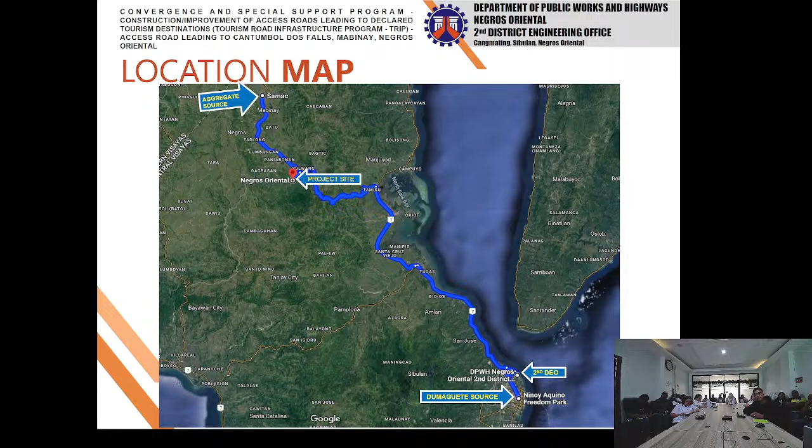We have the location map. The source of the aggregates will be in Samac River and the source of the cement will be in Dumaguete. This is the location map of the project.

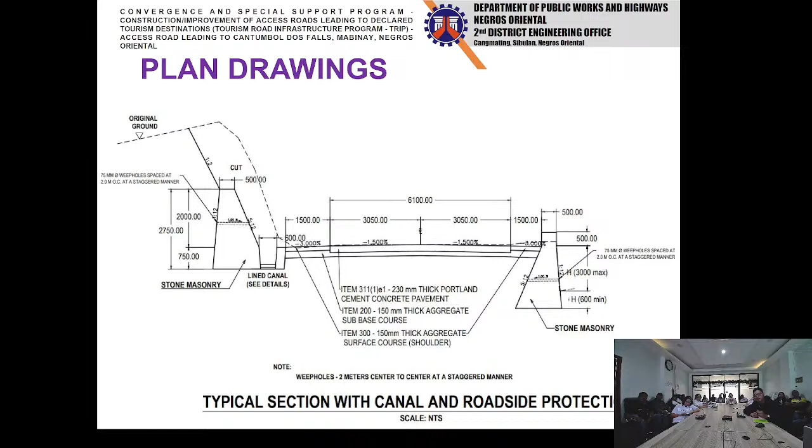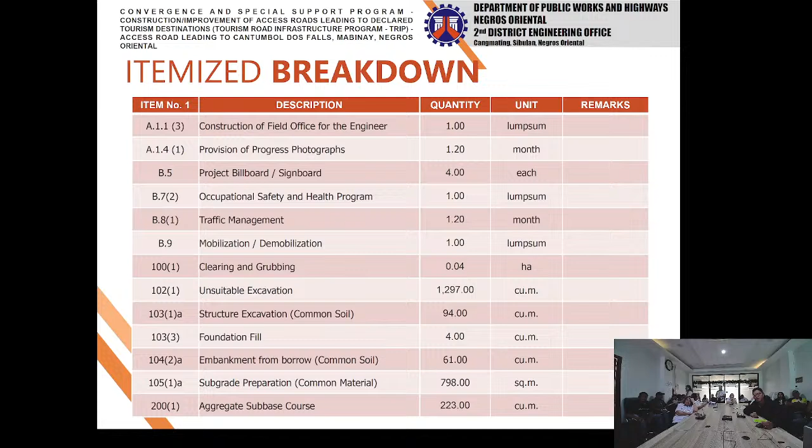The item is breakdown. So the scope of works will include the construction field office for the engineer, provision of progress photographs, project billboard or signboard, occupational safety and health program, traffic management, mobilization, demobilization, clearing and grubbing, unsuitable excavation, structure excavation, common soil, foundation fill, embankment from borrow, subgrade preparation, aggregate subbase course, gravel surface course, Portland cement concrete pavement 0.15 meters thick, 14 days, and Portland cement concrete pavement 0.23 meters thick, 14 days, lean concrete class B 16.5 megapascals, grouted riprap class A, stone masonry, and reflectorized thermoplastic pavement markings both white and yellow.

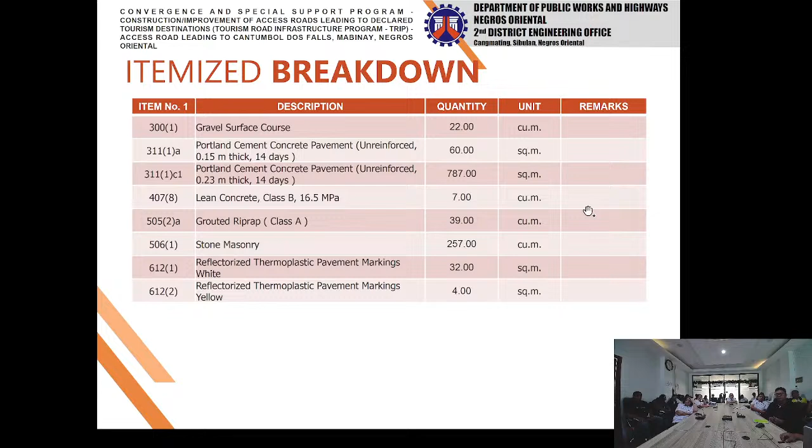Okay, any clarification? There's none. Proceed to next project.

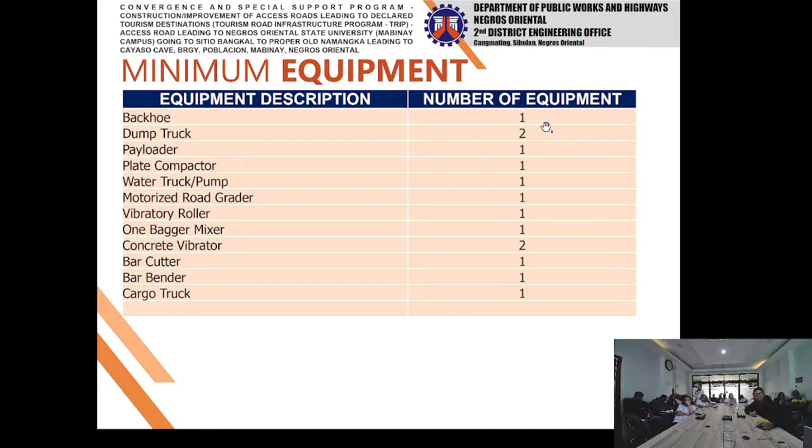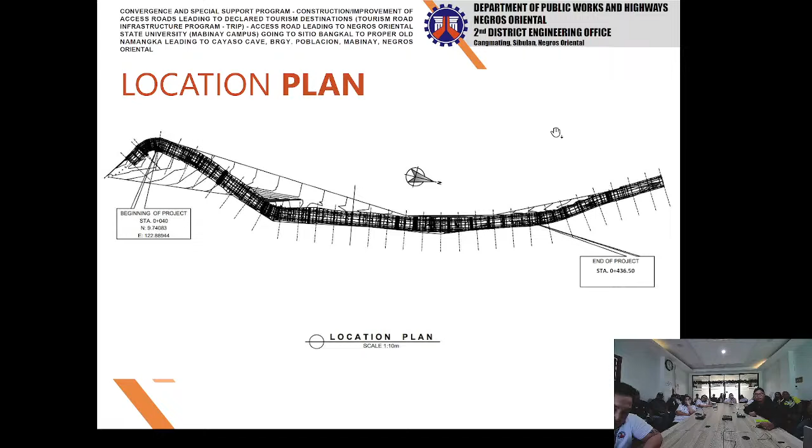This is the beginning of the project. This is the typical section of the project, and a super elevated section with roadside protection.

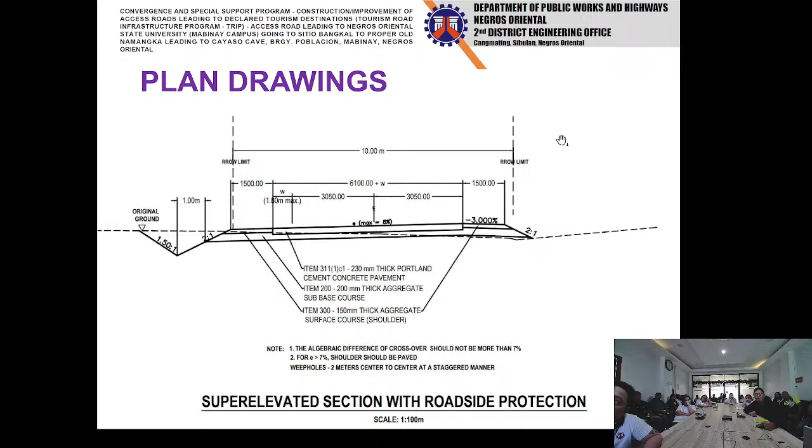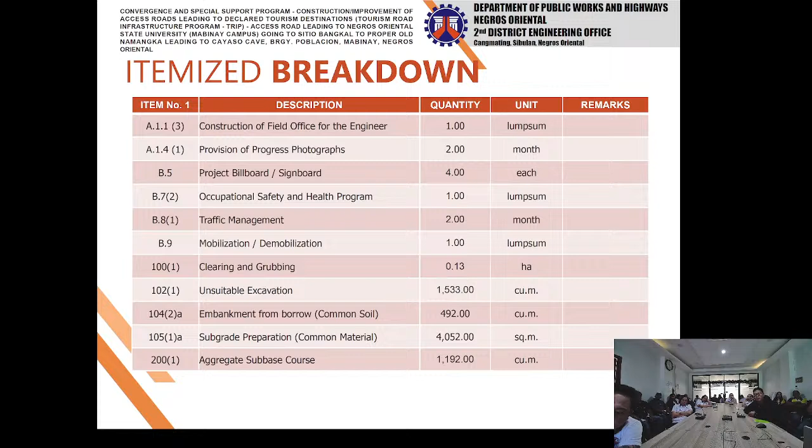from borrow, common soil, subgrade preparation, made of common material, aggregate subbase course, gravel surface course, Portland cement concrete pavement with thickness of 0.15 meters, 14 days, Portland cement concrete pavement with thickness of 0.23 meters, 14 days, and reflectorized thermoplastic pavement markings both white and yellow.

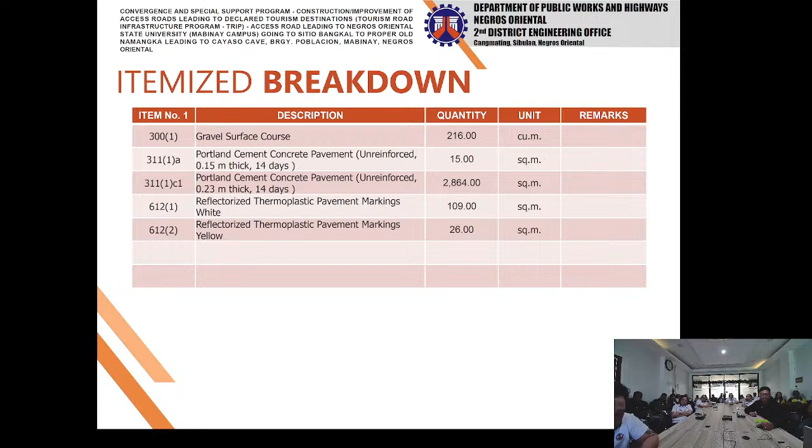The next project will be the Convergence and Special Support Program construction, access roads leading to declared tourism destinations, tourism road infrastructure program, access road from Sitio Palangging leading to Tindog Bato Lake, Bais City, Negros Oriental. Approved budget of contract will have 4.9 million pesos with a project duration of 36 calendar days

and an estimated length of 142.5 linear meters, and the pavement details 6.1 meters with a thickness of 0.23 meters. The minimum equipment are backhoe, dump truck, payloader, plate compactor, water truck or pump, motorized road grader, vibratory roller, one bagger mixer, concrete vibrator, bar cutter, bar bender, and cargo truck.

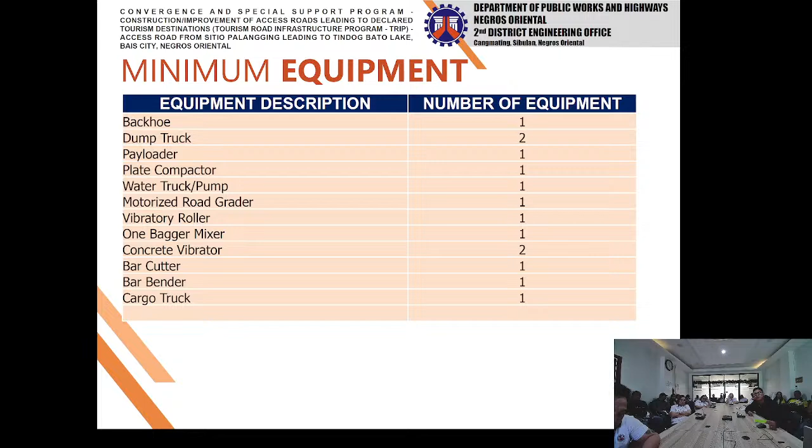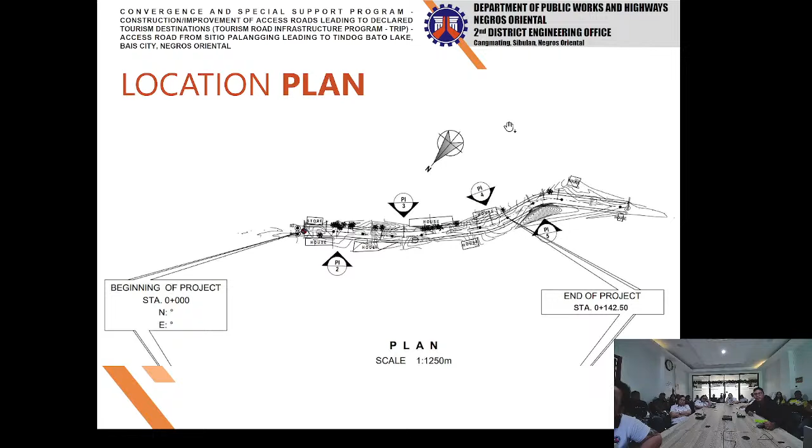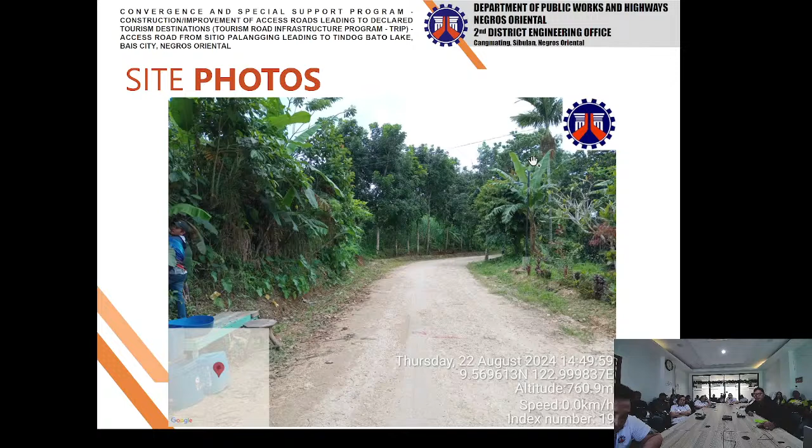Site photo the start of the project and the end station of the project. This is the typical section with the road slope protection and the super elevated section with road slope protection.

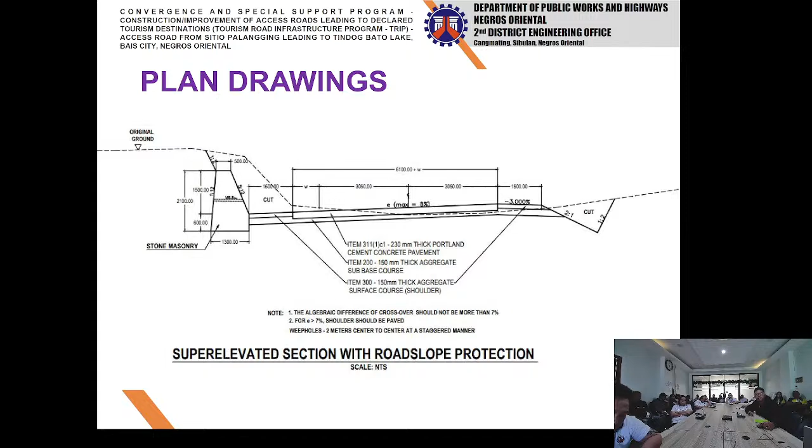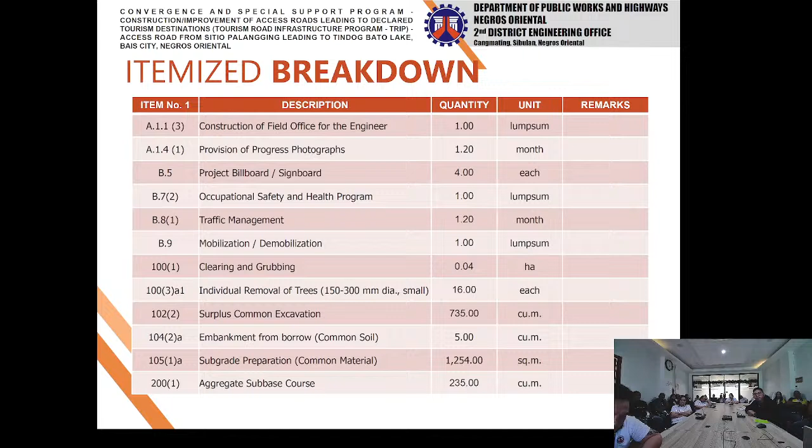The itemized breakdown. The scope of works will include the construction of field office for the engineer, provision of progress photographs, project billboard or signboard, occupational safety and health program, traffic management, mobilization or demobilization, clearing and grubbing, individual removal of trees, surplus common excavation, embankment from borrow, subgrade preparation, aggregate subbase course, gravel surface course, Portland cement concrete pavement

with thickness of 0.23 meters, 14 days, stone masonry, trees furnishing and transplanting, and reflectorized thermoplastic pavement markings both white and yellow.

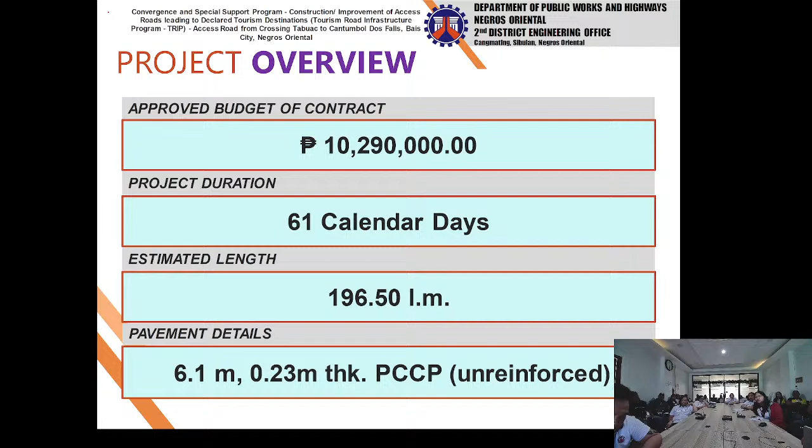Approved budget of contract: 10,290,000, project duration 61 calendar days, estimated length 196.50 linear meters, pavement detail 6.1 meters, 0.23 meters thickness.

Equipment: backhoe, dump truck, payloader, plate compactor, water truck, pump, motorized road grader, vibratory roller, one bagger mixer, concrete vibrator, bar cutter, bar bender, cargo truck.

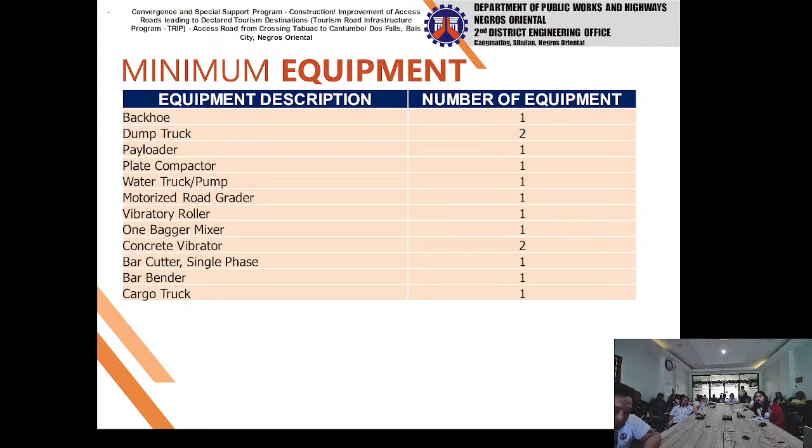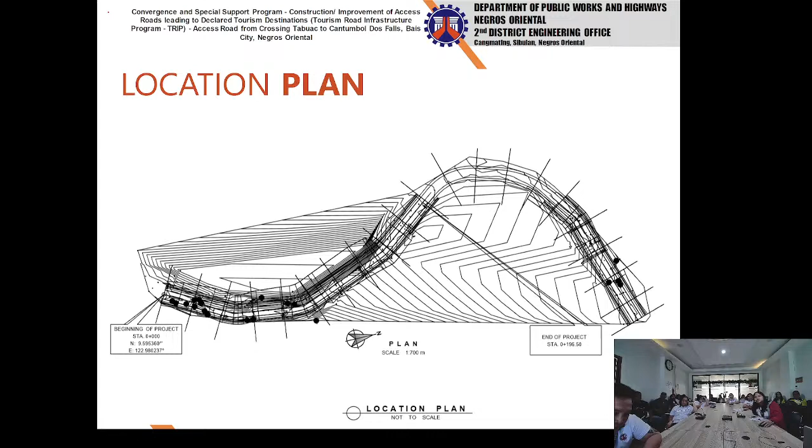So this is the location map. Aggregate source is from Samak River, Mabinay. So this is the location plan.

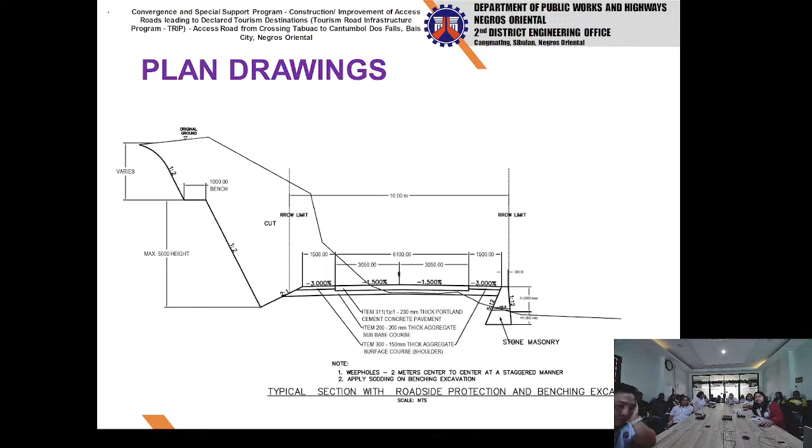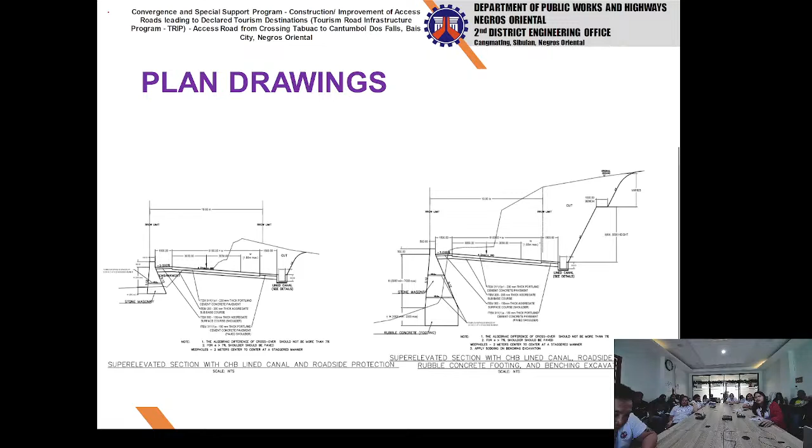Super elevated section with CHB lined canal. Super elevated section with CHB lined canal and roadside protection, and super elevated section with CHB lined canal, roadside protection with rubble concrete footing and benching excavation.

Itemized breakdown. Construction of field office for the engineer, progress photographs, project billboard or sign, occupational safety and health program, traffic management, mobilization, demobilization, clearing and grubbing, individual removal

of trees, unsuitable excavation, embankment from borrow, subgrade preparation, aggregate subbase course, gravel surface course, Portland cement concrete pavement 0.23 meters, 14 days, stone masonry, trees furnishing and transplanting, reflectorized thermoplastic pavement markings, white and yellow.

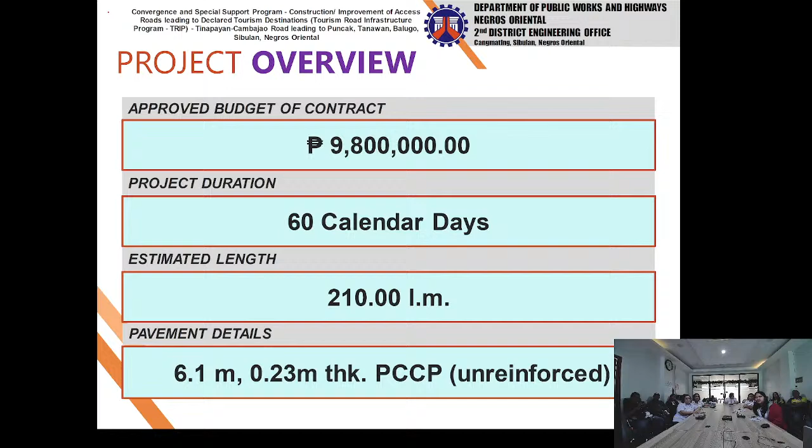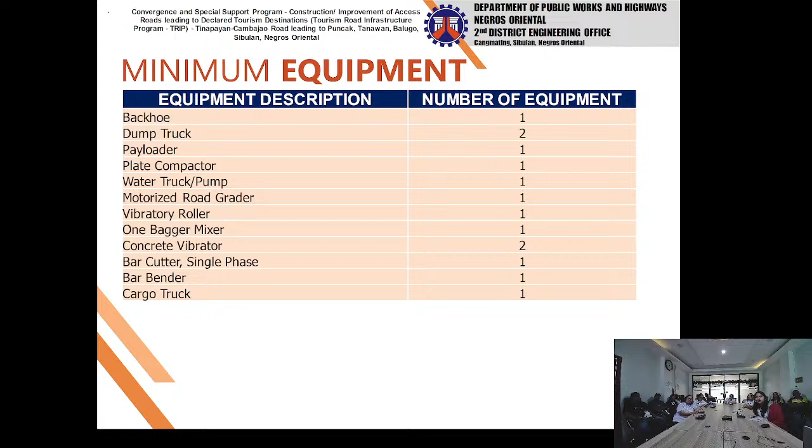Minimum equipment: backhoe, dump truck, payloader, plate compactor, water truck, motorized road grader, vibratory roller, one bagger mixer, concrete vibrator, cargo truck. So this is the location map.

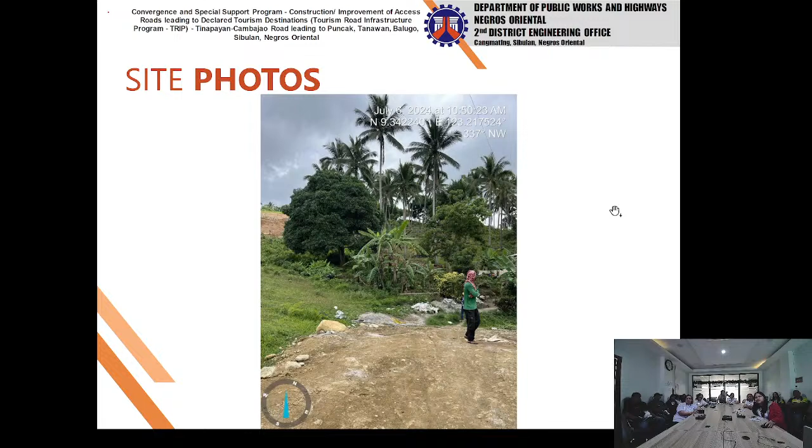Location plan. So these are the same photos.

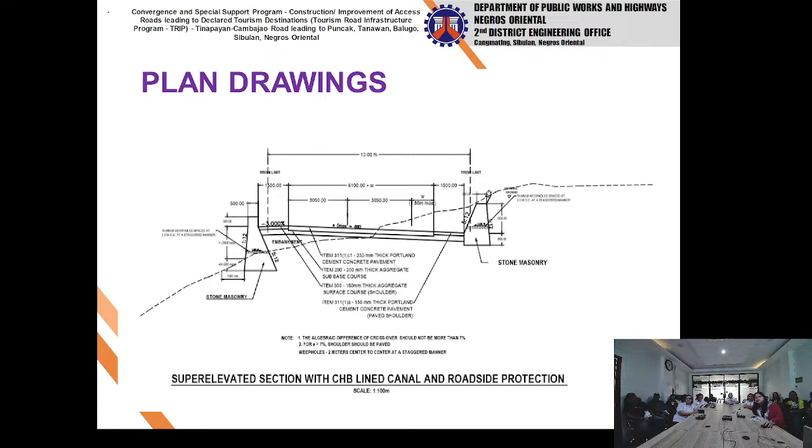This is the typical section, super elevated section with road slope and roadside protection. Super elevated section with CHB lined canal and roadside protection. And super elevated section with road slope protection.

Itemized breakdown: construction of field office for the engineer, provision of progress photographs, project billboard or signboard, occupational safety and health program, traffic management, mobilization, demobilization, clearing and grubbing, individual removal of trees, surplus common excavation, embankment from roadway or structure excavation, subgrade preparation, aggregate subbase course, gravel surface course, Portland cement concrete pavement, 0.15 meters thick, 14 days.

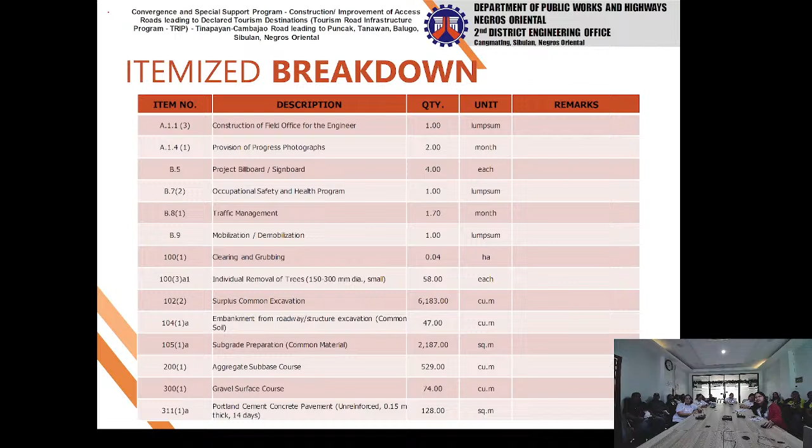Portland cement concrete pavement, 0.23 meters thick, 14 days. Stone masonry, trees furnishing and transplanting, reflectorized thermoplastic pavement markings white and yellow.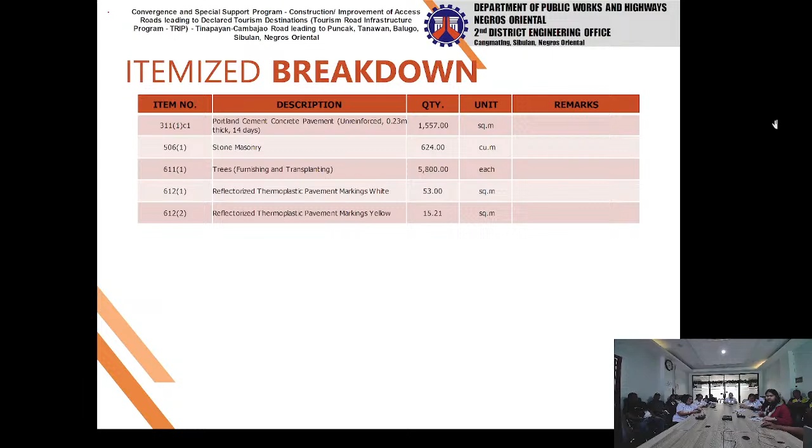Okay, any question and clarification? There will be none. Please proceed to next presenter, Engineer Basa, Procurement HQ 0033.

Good morning, everyone. Organizational outcome: protection of properties against major floods, construction, slope protection structure, Candau-ay, Batinguel, CIS.

Budget of contract: 14,700,000... Project duration is 138 days. Estimated length is 87 linear meters. Service classification: Flood control.

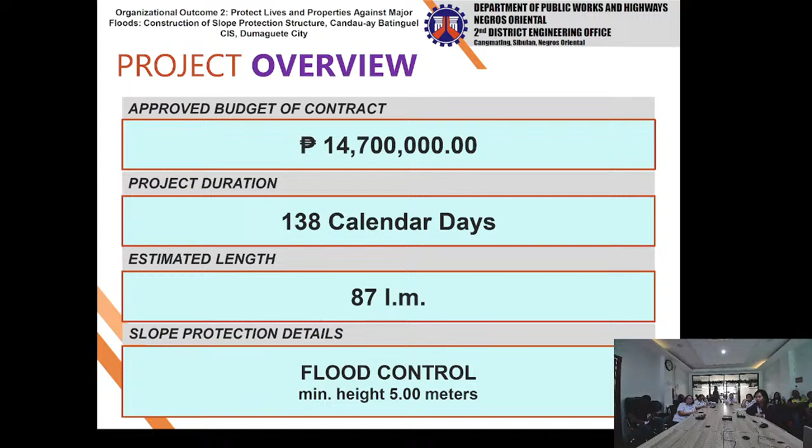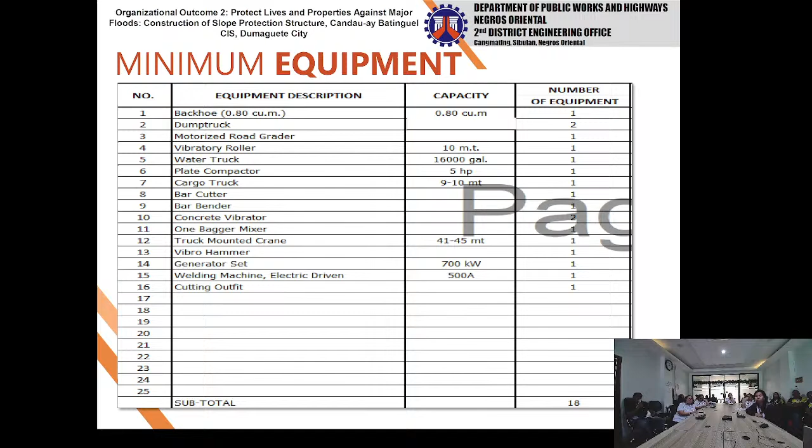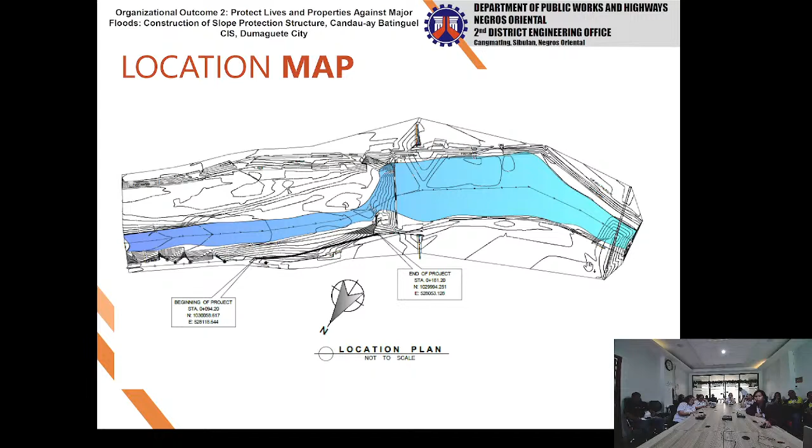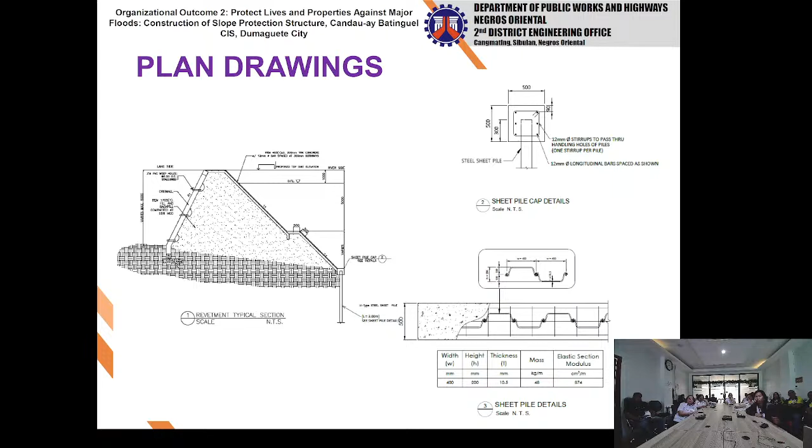Cribwall elevation, grouted riprap details, column elevation, details of...

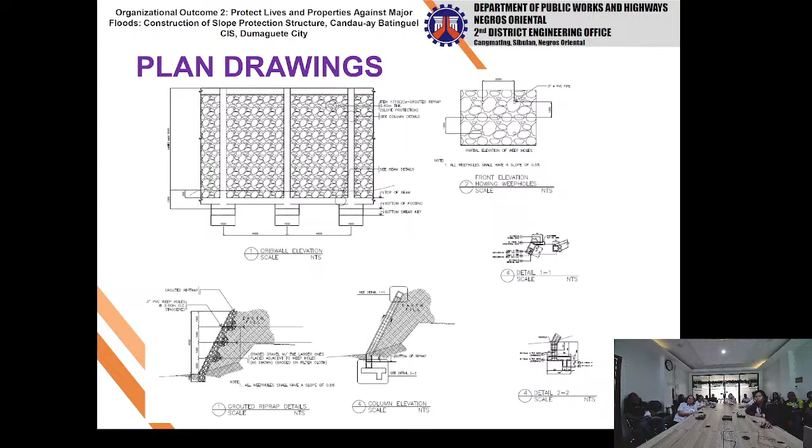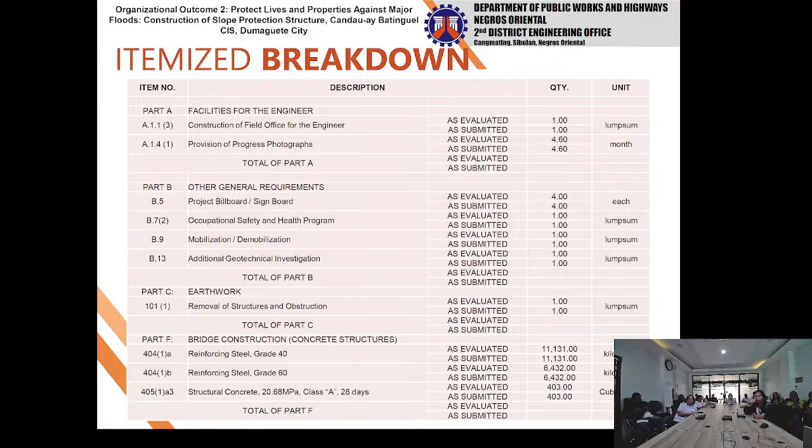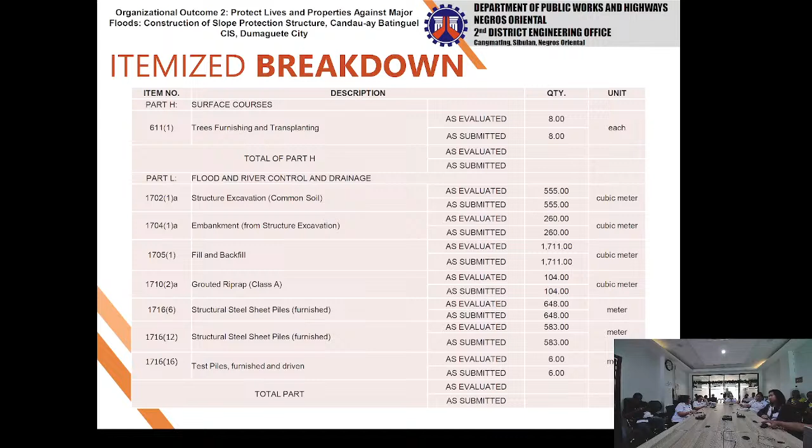That's okay, any clarification? Let's proceed to next presenter, Engineer Sagwan, for 25 HK 0036.

This project is 25 HK 0036. Organizational outcome 1: Ensure safe and reliable National Road System Network Development Program. Road widening, primary roads, Bais Kabankalan Road, station K0085 plus 190 to K0085 plus 848 and K0088 plus 074.1 to K0088 plus 500.

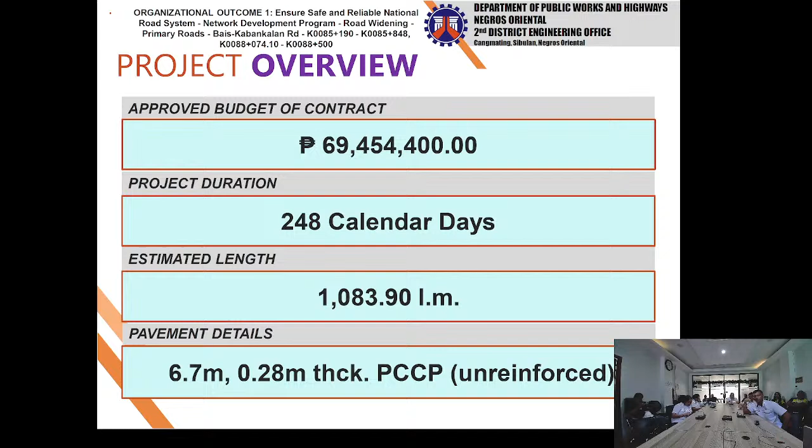Budget of contract: 69,454,400. Total calendar days: 248 calendar days. Estimated length: 1,083.9 linear meters. Pavement details: 6.7 meters with 0.28 meter thick PCCP unreinforced.

Minimum equipment requirement: backhoe with breaker, dump truck, cutting outfit, chainsaw, payloader, concrete saw blade, boom truck, plate compactor, water truck, vibratory roller, motorized road grader, concrete saw blade, concrete vibrator, bar cutter, joint sealant machine, bar bender, cargo truck, applicator machine, kneading machine, one bagger mixer, backhoe wheel type, cargo truck 2 to 5 metric tons, and concrete screeder.

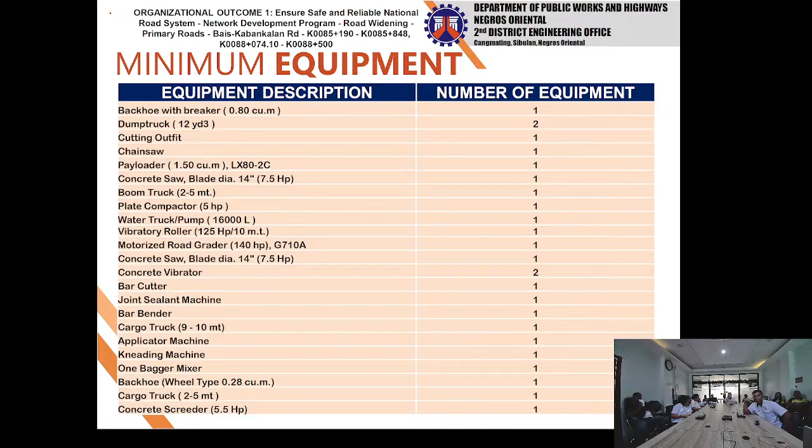Location map. The source of the aggregates is Tanjay River.

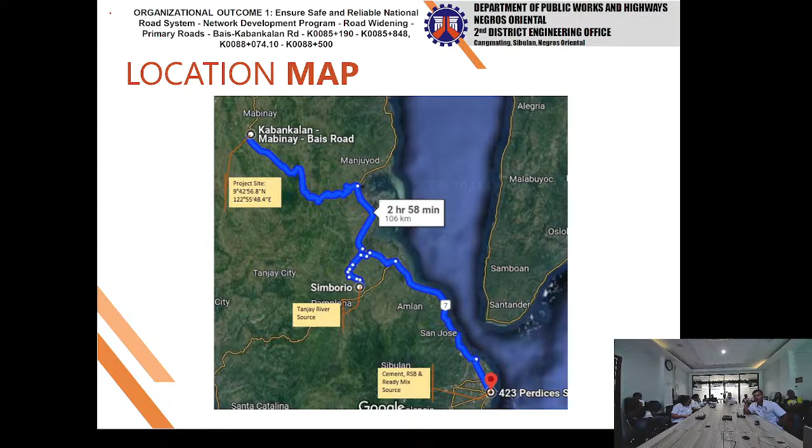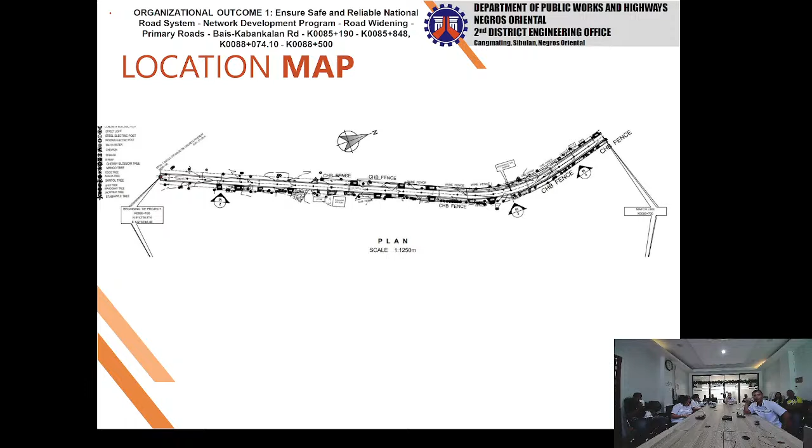The first site is located at kilometer 85,190 to kilometer 85,848.

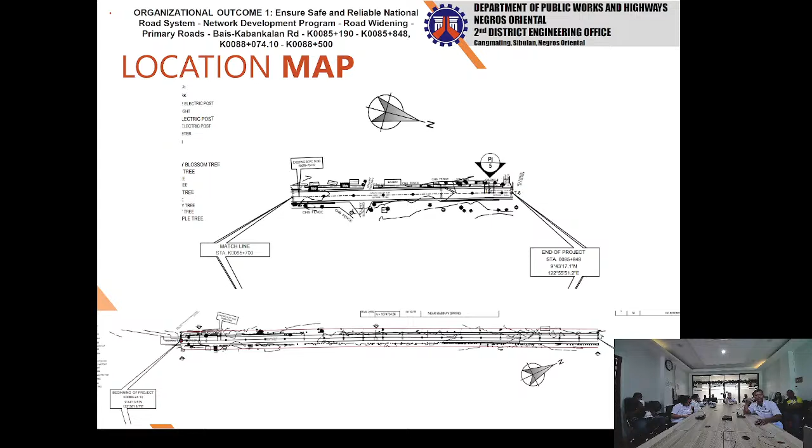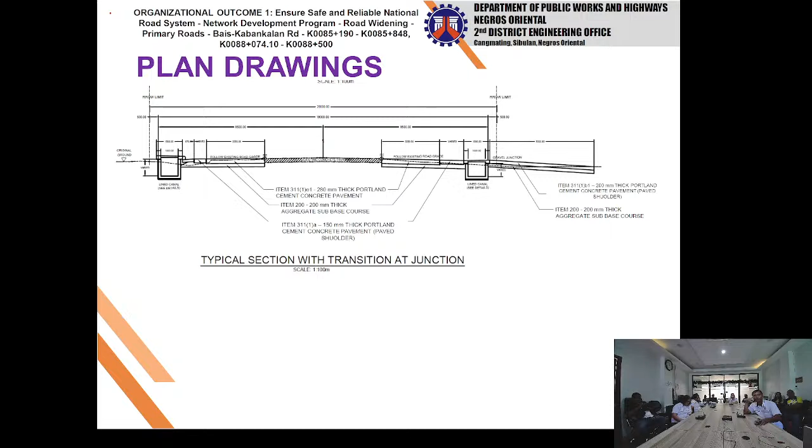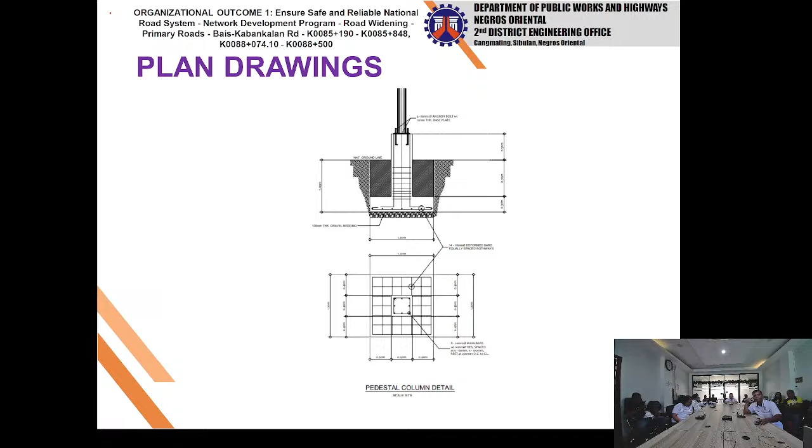and for pedestal column detail, itemized breakdown. Part A, facilities for the engineer, construction of field office for the engineer, provision of progress photographs. Part B, general requirements: project billboard signboard, occupational safety and health program, traffic management, mobilization, demobilization, removal and relocation of utilities.

Part C, earthwork: clearing and grubbing, removal of structures and obstruction, removal of other structures and obstructions, curb and gutter, removal of structures and obstruction concrete, individual removal of trees 150 to 300 mm diameter, 301 to 500 mm diameter, 751 to 900 mm diameter.

Part D, sub-base and base course, aggregate sub-base course. Part E, surface courses: Portland cement concrete pavement unreinforced 0.15 meter thick, 0.2 meter thick, 0.28 meter thick, and 0.3 meter thick.

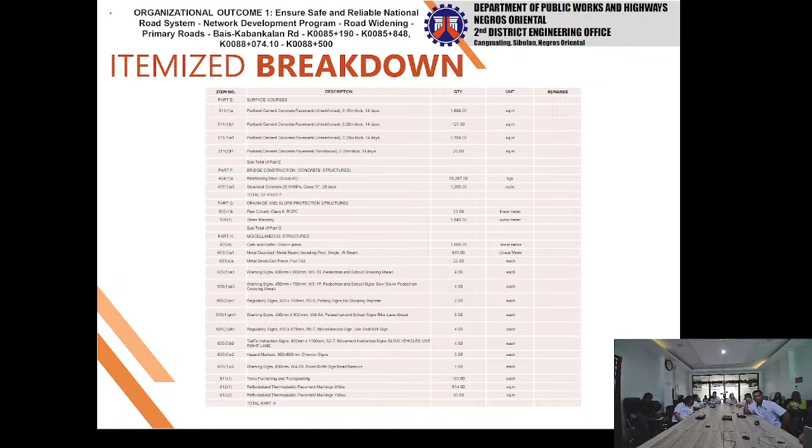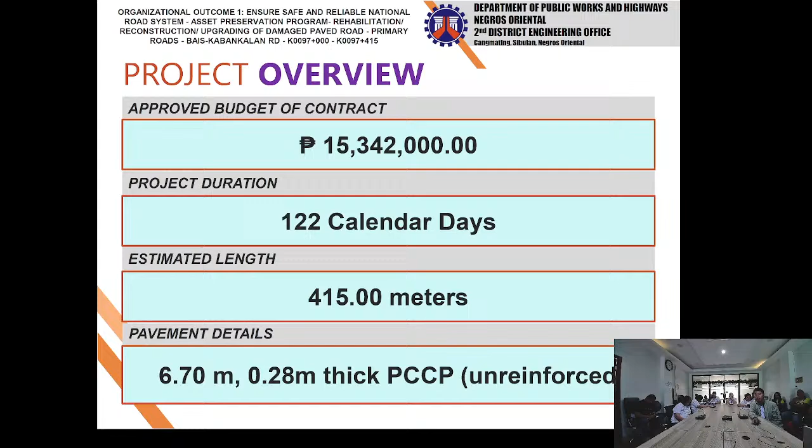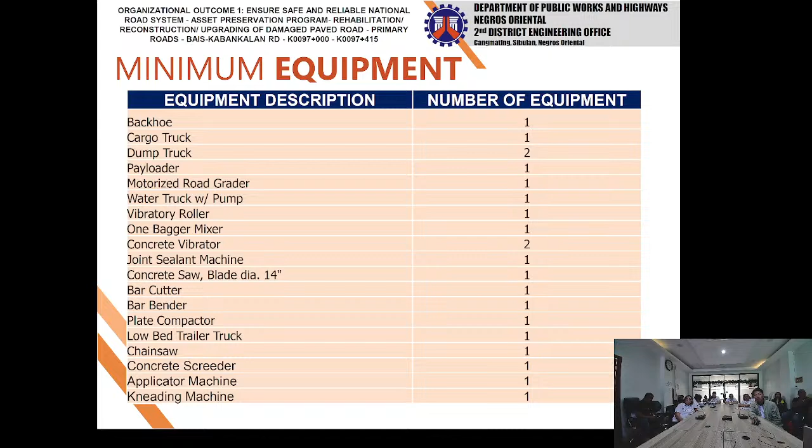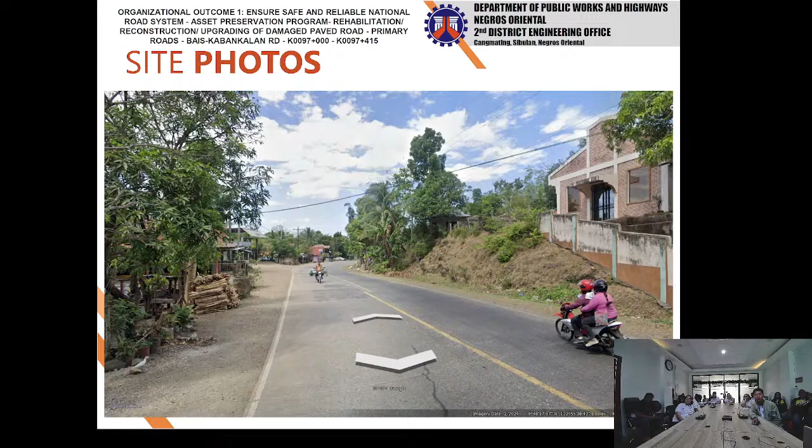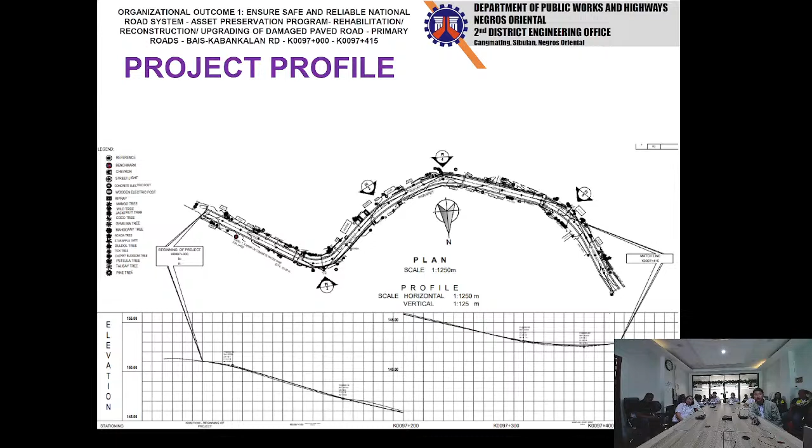And here we have the site photos, the picture, project profile. Here we have the super elevated section with boulder fill, and here we have the super elevated section with the existing RCBC.

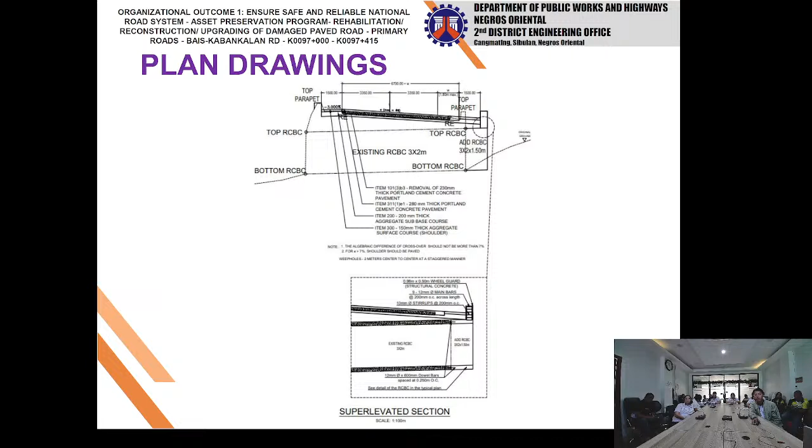So for the itemized breakdown, we have Part A, facilities for the engineer: construction and field office for the engineer, provision of progress photographs, and for the other general requirements we have project billboard signboard, occupational safety and health program, traffic management, mobilization, demobilization. For the earthworks, we have removal of actual structures, 0.23 meter thick PCCP unreinforced, unsuitable excavation, surplus

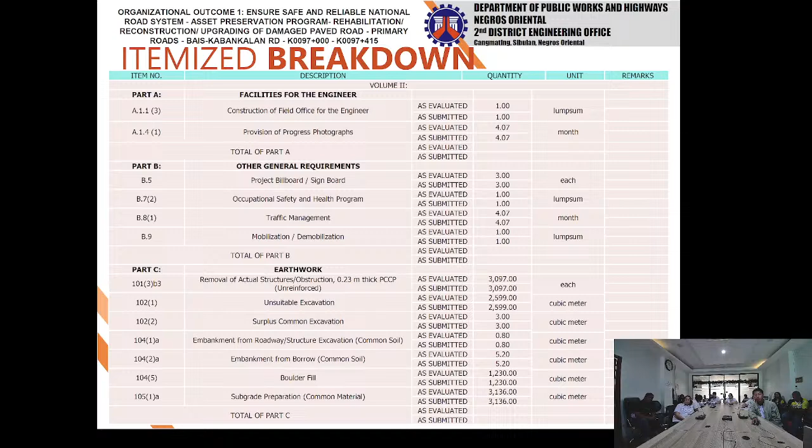common excavation, embankment from roadway, structure excavation common soil, embankment from borrow common soil, boulder fill, and subgrade preparation.

So for the subbase and base course, we have item 200, aggregate sub-base course. For the surface courses, we have gravel surface course, Portland cement concrete pavement unreinforced 0.28 meter thick, 14 days. For the bridge construction and concrete structures, we have reinforcing steel grade 40, reinforcing steel grade 60, and structural concrete 20.68 megapascals class A, 28 days.

For the drainage and slope protection structures, we have stone masonry. For the miscellaneous structures, we have traffic instruction signs, reduced speed, then hazard markers, chevron signs, and reflectorized thermoplastic pavement markings, white and yellow. That's all.

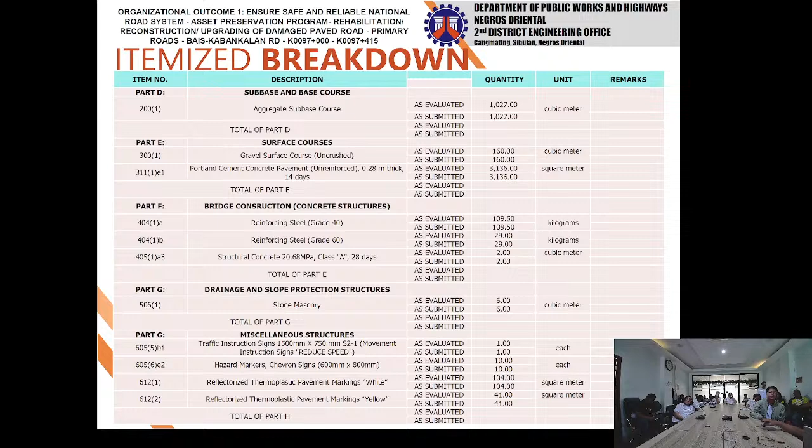Good morning, everyone. 25 HK 0040, Organizational Outcome 1, ensure safe reliable national road system network development program. Road widening primary roads, Bais-Kabankalan Road, kilometer 94 to kilometer 95.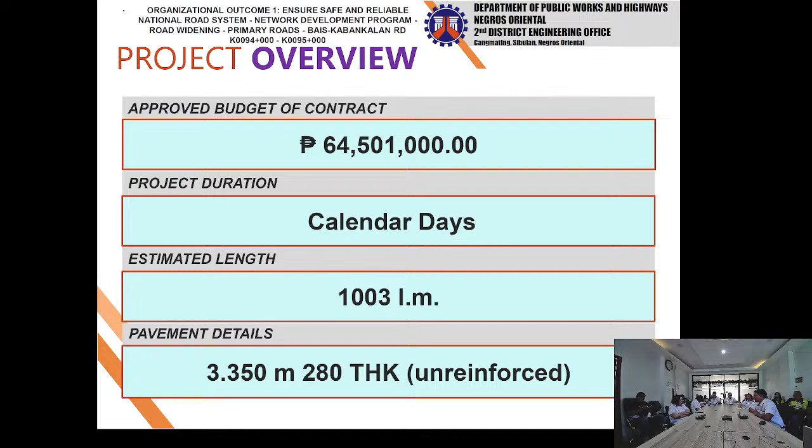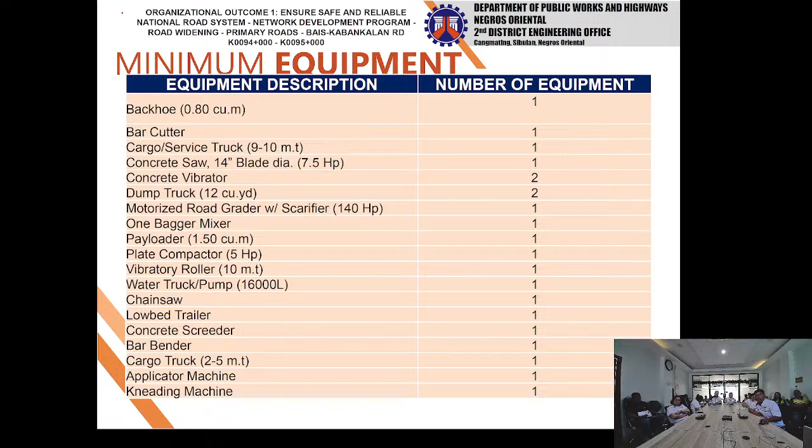The minimum equipment is backhoe, bar cutter, cargo service truck, concrete saw, concrete vibrator, dump truck, motorized road grader with scarifier, one bagger mixer, payloader, plate compactor, vibratory roller, water truck or pump truck, chainsaw, low bed trailer, concrete screeder, bar bender, cargo truck, applicator machine, and kneading machines.

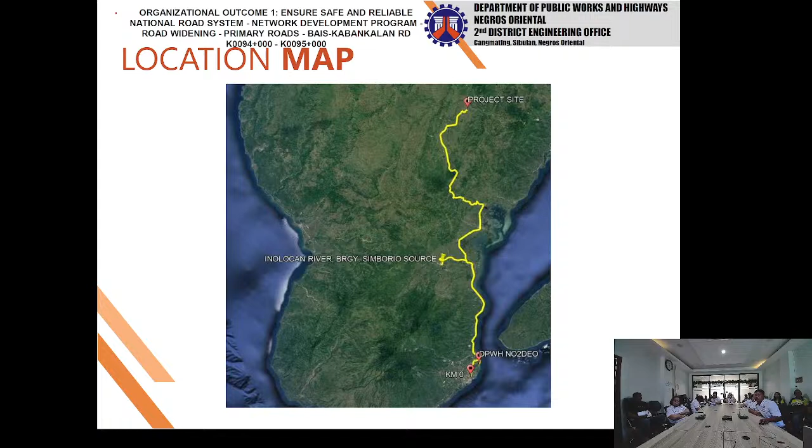Here is the location map. The aggregate source is in the Inolocan River, Barangay Simborio.

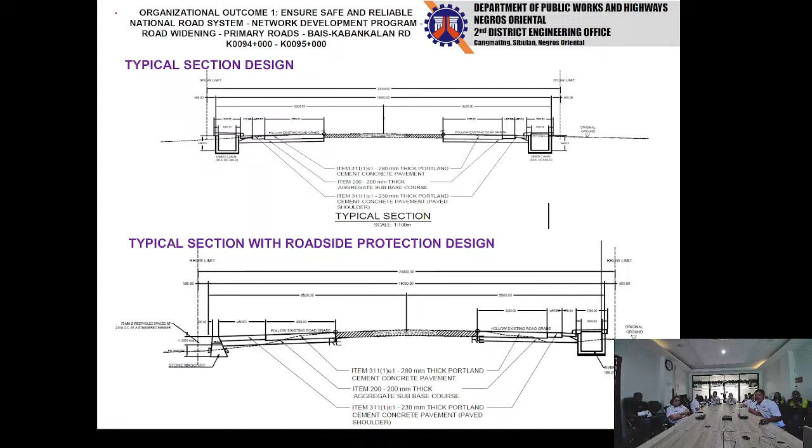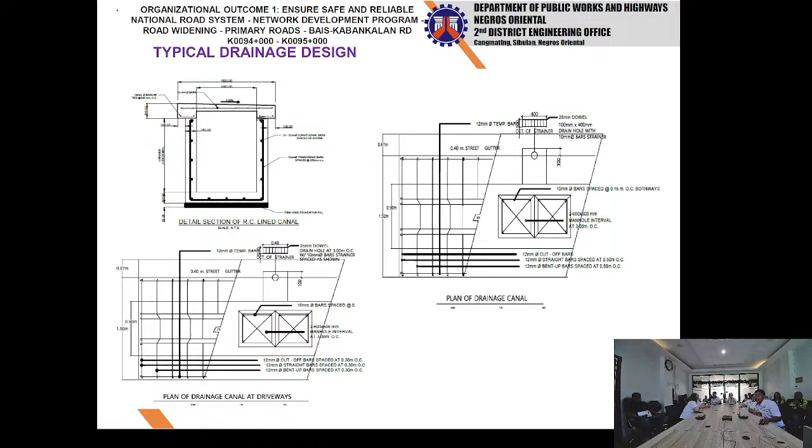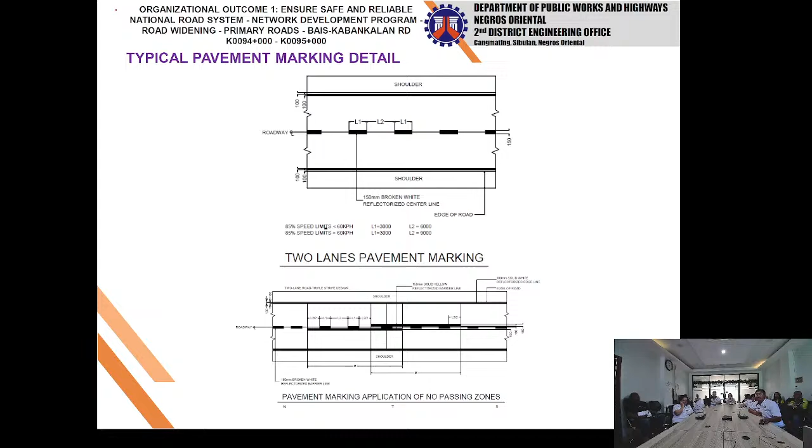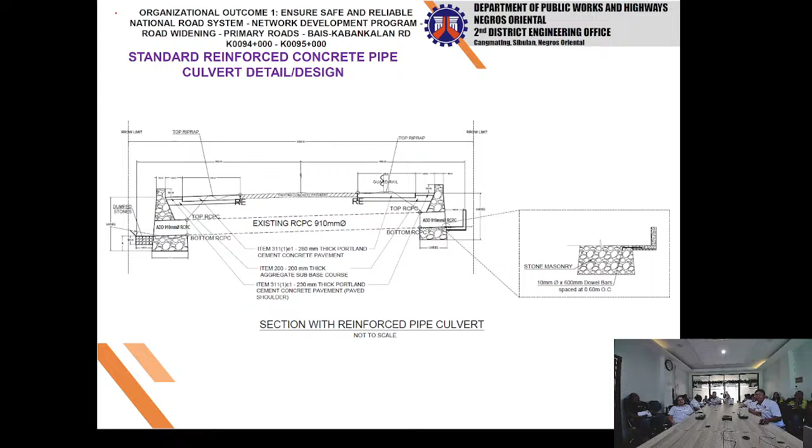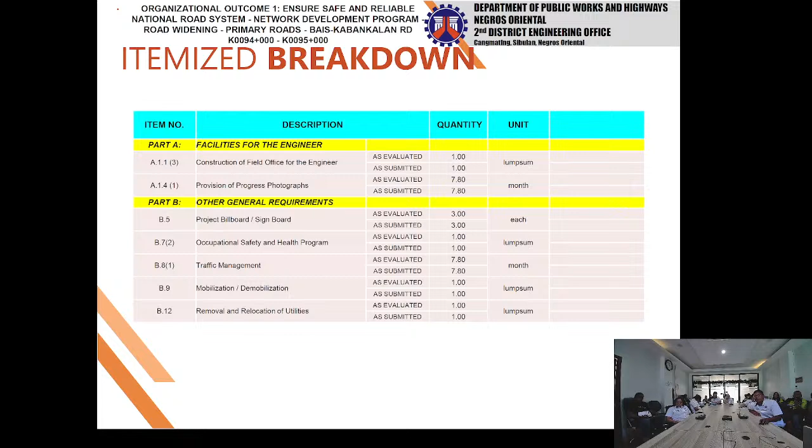Itemized breakdown. For part A, construction of field office for the engineer, provision of progress photographs. For part B, project billboard or signboard, occupational safety and health program, traffic management, mobilization or demobilization, removal and relocation

of utilities. For earthwork, clearing and grubbing, individual removal of trees, small 150 to 300 mm diameter, individual removal of trees, small 301 to 500 mm diameter, individual removal of trees, small 501 to 750 mm diameter, and individual removal of trees, 751 to 900 mm diameter.

Diameter, sorry ma'am, sorry.

Sorry ma'am. Removal of actual structures or obstruction, 0.28 meter thick PCCP unreinforced, removal of structures and obstruction, removal of surplus common excavation, structure excavation, common soil, foundation fill, embankment from roadway excavation, common soil, subgrade preparation, common material,

and for part D, aggregate sub-base course.

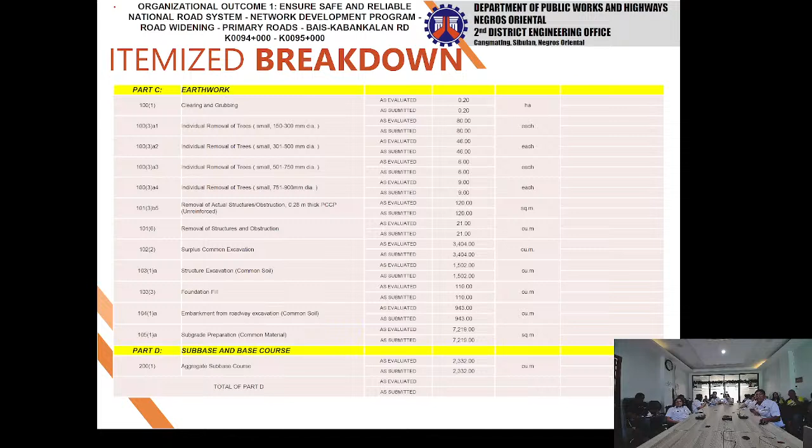For part E, Portland cement concrete pavement unreinforced, 0.23 meter thick, 14 days. Portland cement concrete pavement unreinforced, 0.28 meter thick, 14 days.

Reinforcing steel grade 48, structural concrete 20.68 megapascal, class A, 28 days. Pipe culvert 910 mm diameter, class 2, RCPC.

Stone masonry, curb and gutter, warning signs W2-9C, intersection and junction signs, priority merging, warning signs, pedestrian and school signs, bike lane ahead, regulatory signs, speed restriction

maximum, regulatory signs, miscellaneous signs use seatbelt sign, traffic instruction sign, movement instruction sign, reduced speed, traffic instruction sign, movement instruction sign, slow vehicle use right lane, trees, and reflectorized thermoplastic pavement markings white.

That's all. Okay, any question and clarification?